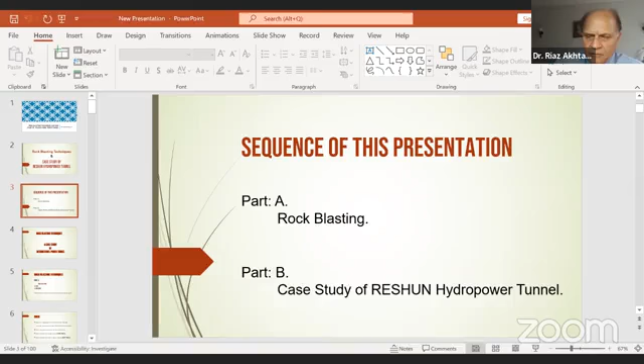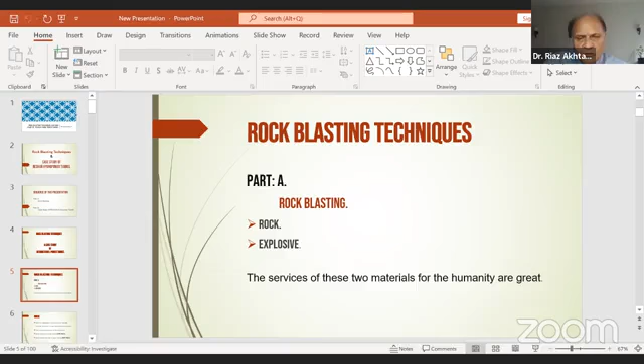Rock blasting techniques. In rock blasting, two materials are involved: one is rock, and second is explosive. The services of these two materials for humanity are great, and they have provided solutions for so many engineering problems.

Rock is an aggregate of minerals, which are naturally occurring substances having a fixed chemical composition. Thus, minerals control much of the rock behavior. The quality of rock depends upon the mineral that the rock contains. Sometimes minerals are strong, then the rock is hard rock. If the minerals are weak and soft, then the rock is soft rock. This is a very generalized classification of rock; I'm not going into a detailed geological classification.

What is the difference between rock and rock mass? Rock means continuous, homogeneous, isotropic, intact rock containing no significant fracture. Whereas rock mass is rock with joints, fractures, faults, and all geological discontinuities in the rock matrix. That is rock mass.

Actually, in tunneling and in engineering, we are dealing with the rock mass, not the rock. So I just clarify this terminology of rock and rock mass. What is rock and what is rock mass? What does it mean when we are calling it rock mass? That is the rock mass — the rock with all faults, joints, fractures, cracks — that we are dealing with.

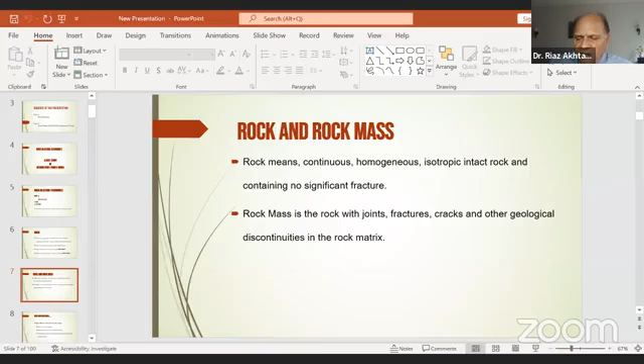Types of rocks are formed by three main origins. Again, it's the simplest classification and division of rock. Simplified, three main origins are there: igneous rock from magma, lava, volcanoes; sedimentary rock from sediments, lithification with time; and metamorphic rock through metamorphism due to high pressure and temperature.

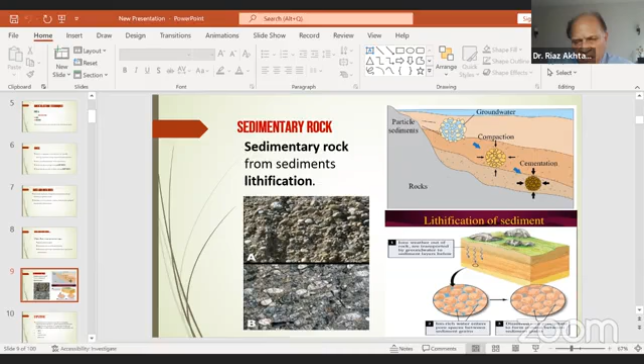Sedimentary rock forms from sediments through lithification. With time, the water in the substance in the rock material reacts with the ions of the rock, and then solidified, well-cemented rock particles, sediments appear. 75% of the surface of the earth is this sedimentary rock, whereas in the crust sedimentary rock is only about 5%. I'm explaining this because the case study of the tunnel which we are going to discuss today was 75% of this material — a well-cemented conglomerate was there for the blasting purposes. So I'm explaining it a bit in detail, that sedimentary rock.

Now we come to define the explosive. An explosive is a reactive substance that contains a great amount of potential energy that can produce an explosion if released suddenly, usually accompanied by production of light, heat, sound, and pressure.

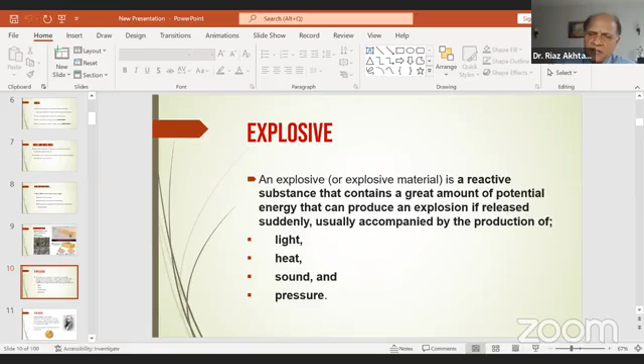When this explosive reacts, these are the parameters we are observing.

While talking about explosives, no one can ignore that great man, Alfred Nobel, Swedish chemist, engineer, inventor, businessman, philanthropist. He invented the first generation dynamite in 1867. He is also known as the benefactor of the Nobel Prize, which is the highest prize in the world, I think, so far.

In Pakistan, the main manufacturers of explosives are Biafo and Nobel. Biafo in Hattar is manufacturing super blaster and breaker. Their product is a bit inferior compared to Nobel.

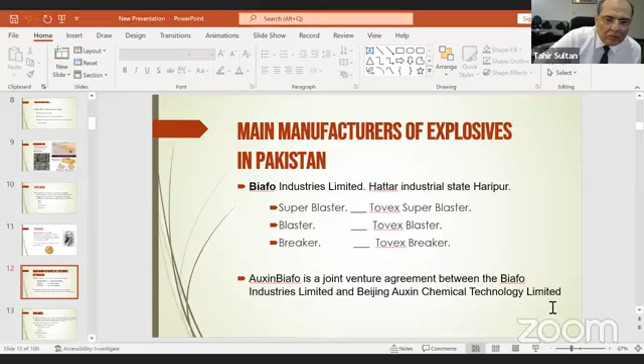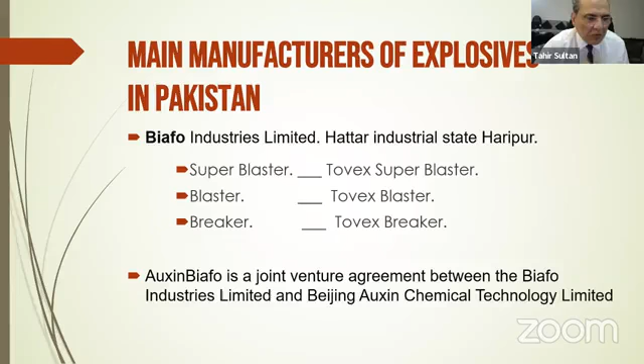The famous Nobel is a joint venture with Sweden, Japan, and many other countries. They are producing quality explosives, quality dynamite there. Now they also have a joint venture with Saudi Arabia and other countries.

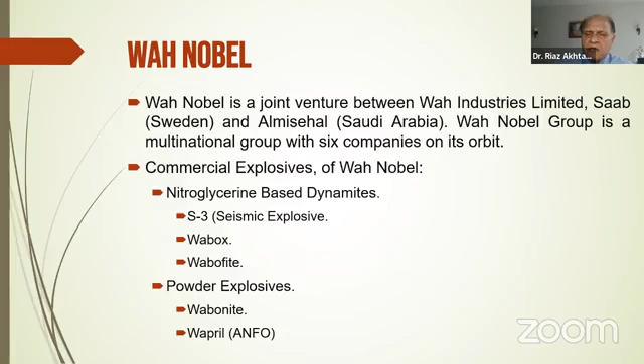Commercial explosives of Nobel include nitroglycerin-based dynamites, S3 seismic explosive, and Wabox. Wabox is an excellent product of Nobel. Then there's Wabofite, and the powder explosives Wabonite and ANFO, which is ammonium nitrate with fuel oil.

Then emulsion explosives: seismic emulite E3, emulite 150, and emulite 100, permissible Emulite. These are the emulsion explosives.

To detonate these explosives, there are accessories, detonators. Detonator number 8 plain, that is a trade name, and electric delay detonator number 8 also. Different delays are there - 25 milli detonator, then half-second detonator. This is the delay time. 25 milli means it is 1/40th of a second, the time delay.

There is Leher, also a trade name of the detonator - seismic detonators, millisecond MS, and half-second electric detonators. Blasting cord, Wabocord is there, safety fuse is there.

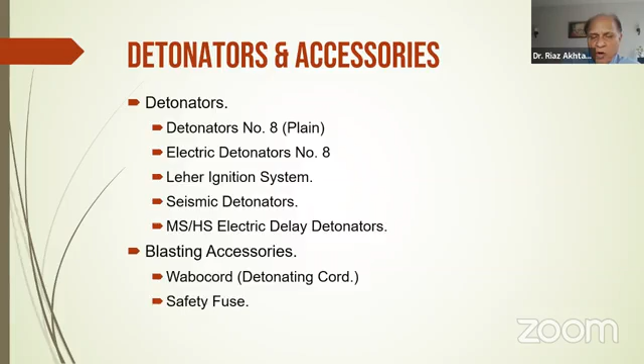Then the Wabox, brief introduction - a nitroglycerin-based dynamite. This is an excellent product of Nobel giving excellent results of advance in charging. It is very good in handling, and the safety record is beautiful, no risk is there. It's a beautiful product, the Wabox.

It is a state-of-the-art type of product, widely used in explosives, in tunneling, and in all other activities of excavation on surface or underground. This product is excellent, and mostly engineers are using this Wabox.

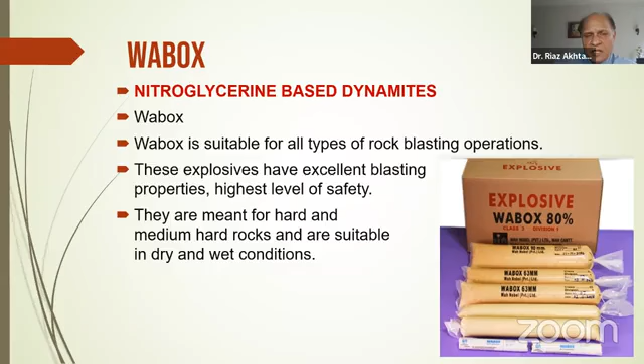Then there is seismic explosive S3, mostly used for exploration in the oil industry. They are using it - good for water resistance, extremely high hydrostatic pressure bearing, capable of withstanding that. So it is being used for oil exploration. This is a good product for that field.

Wabofite is a bit inferior nitroglycerin-based dynamite compared to Wabox, and a bit cheaper also. The combination of these two explosives, Wabox and Wabofite, is good to get optimum advance in excavation, in tunneling. This product is also very good in combination to achieve some economy in blasting.

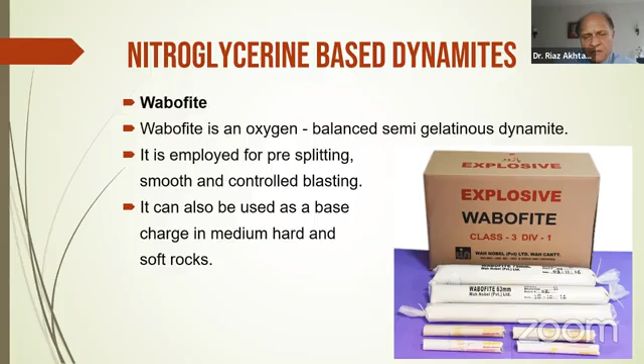It's good for soft rock, but the combination of Wabox and Wabofite can give good results even in the case of hard rock.

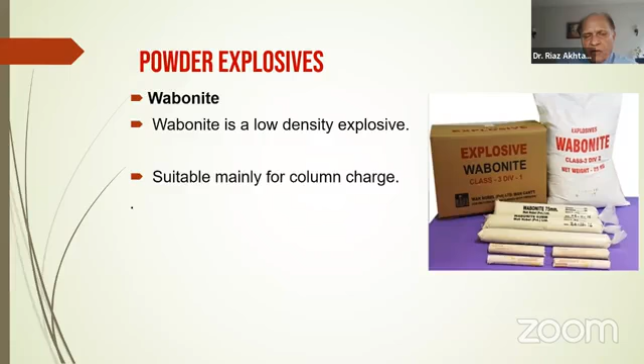Wabonite is a low density powder explosive, suitable mainly for column charges. Sometimes we charge the column, and as primer we use dynamite - Wabox we use as primer dynamite - and then with the combination of Wabonite and Wabofite, we get the economy there.

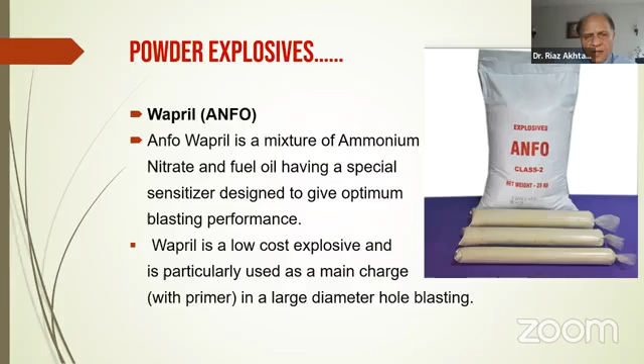Then there is ANFO again, for large explosions and for large diameter drilling holes. For dry conditions, we use ANFO for excavation of the surface, preferably surface blasting, benching. We are using this ANFO.

Seismic emulite, seismic emulsion explosive E3, meets the highest standard of safety. E3 has excellent storage properties, especially to bear temperature and humidity. It is good for high temperature and humid places.

Emulite 150, again a trade name, trade nomenclature of the explosive, can be used as bottom charge for any kind of blasting, especially for deep underwater blasting. We use these emulsion explosives there. These are also emulsion explosives of different trade nomenclature, having different properties.

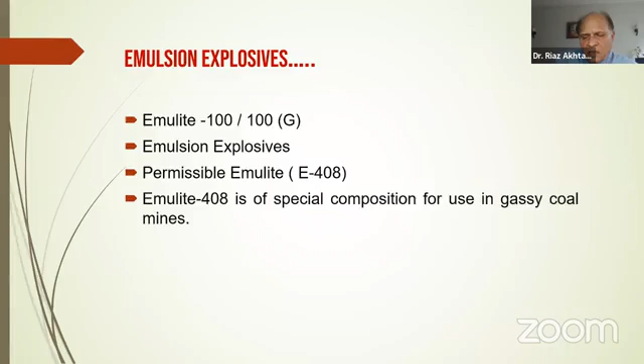For specific jobs, we are using emulsion explosives. Then there are detonators to detonate the explosive. These are the accessories of Wah Nobel.

Plain detonator - this is a non-electric delay detonator. When there is an open excavation, that's a bench excavation, so we are using this.

At that time, we are not needing any delay blasting there. In case of bench blasting or surface blasting, we are always having two faces free there, so the rock can move easily.

But in case of underground blasting, or tunneling, we are having only one face for moving - space is there only at one face. But sometimes in bench blasting, we might be having three faces even, if it is corner blasting there, so we encounter three faces open.

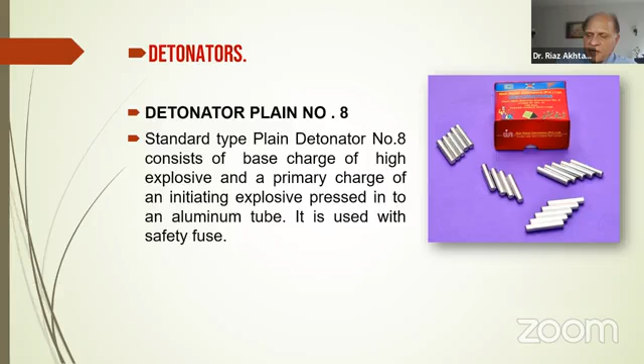And that is very easy. With a minimum use of the dynamite, we can get a maximum production there.

Then there are electric detonators. These detonators are required for blasting purposes, especially for tunnel or generally underground blasting. We are requiring the delay to blast the different drill holes.

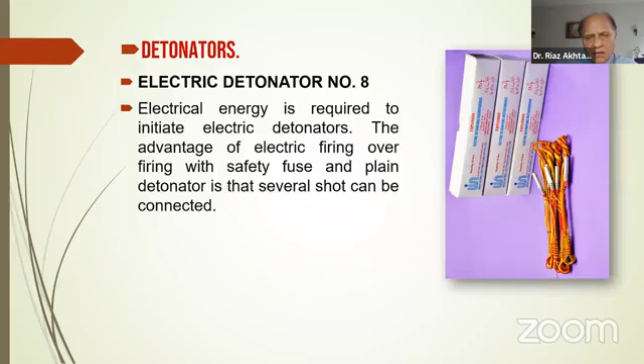These are again detonators. Leher is again a commercial nomenclature of detonation. This is initiated by shock wave, not electric detonation - Leher is acting as a non-electrical detonator, acting with shock waves.

Advantage is no stray current is passing anywhere in case of Leher - no side initiation, no noise problem, simple and rational connections, no limits on the size of the blast round. You can blast as many drill holes as you like.

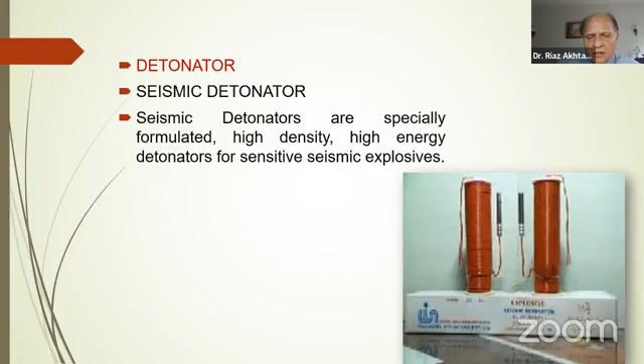Excellent detonator. Seismic detonators used for the exploration of the oil field, creating a sensitive seismic explosive to detonate. These two are very important detonators.

Millisecond, half-second electric delay detonators - we select these. Millisecond means it is 1,000th part of the second.

And we used 25 milliseconds in our Reshun tunnel. That meant 1/40th part of the second.

Millisecond and half-second electric delay detonators are meant to effect delayed blasting action in multi-row bench blasting and tunneling, giving better fragmentation of the rock. As desired, we can have required fragmentation and size of the excavated rock there, just by changing the timing and the quantity of the dynamite.

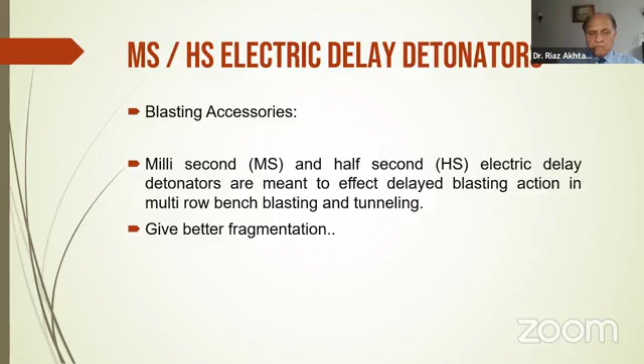Then there is Weber cord, detonating cord, that is waterproof with PVC and having a coating of powder explosive there. We are using that also.

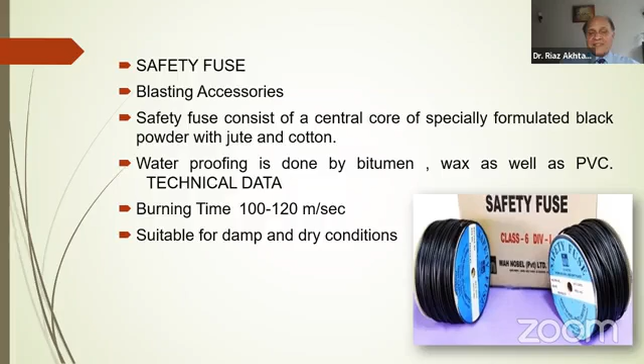And this is the famous black safety fuse. As we have observed in the movies, they are blasting with this - a cord is burning there and reaching the dynamite, and then there is a blast. That is the famous cord we are using there.

Rock drilling system. Mechanical operation can be performed basically in two ways, by percussive and rotary action. Though two actions are there for drilling purposes, we are using only these two, and sometimes it is a combination of both, rotary and percussive motion of the drill machine.

That is then called the hybrid method, rotary-percussive method, which is a combination of these two mechanical actions for rock drilling.

Techniques of controlled blasting means to mitigate adverse impact of blasting in open pits, quarries and tunnels, underground metal mines, and construction working. The purpose of the technique is to do the blasting in a way that minimum disturbance should be there.

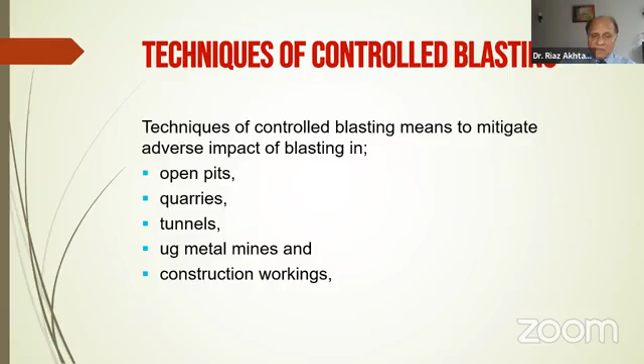Disturbance of the inhabitants, disturbance of the other locality there, structures there, and disturbance of the mother rock even - we are requiring not to damage the mother rock. So that is a technique to control the blasting, to mitigate all these problems.

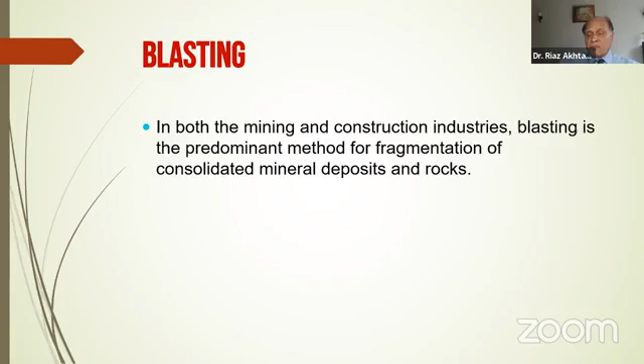In both the mining and construction industries, blasting is the predominant method for fragmentation of consolidated mineral deposits and rocks. This is the method for getting the fragmentation of the rock or minerals.

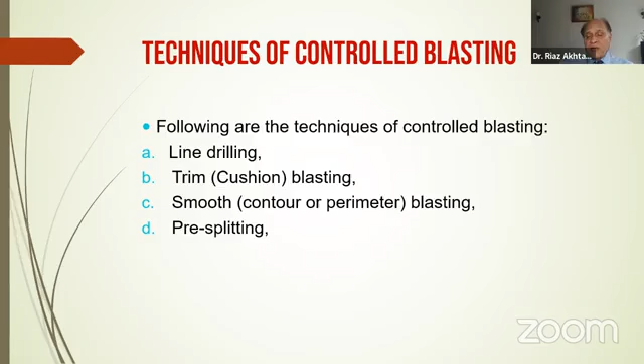To control all these impacts of blasting, the following are the techniques of controlled blasting: line drilling is one method; trimming or cushion blasting is a second method; and then smooth contour or perimeter blasting, and pre-splitting. These are the blasting techniques we adopt to mitigate all those problems.

This system, line drilling. What is line drilling? The system involves a single row of closely spaced, uncharged holes along the neat excavation line. We drill a line of drill holes without charging them, just providing a sliding surface, a breaking surface to save the mother rock behind that line. We don't want to disturb the mother rock, so we drill holes in a line to split that portion of rock mass which we are going to blast and fragmentate.

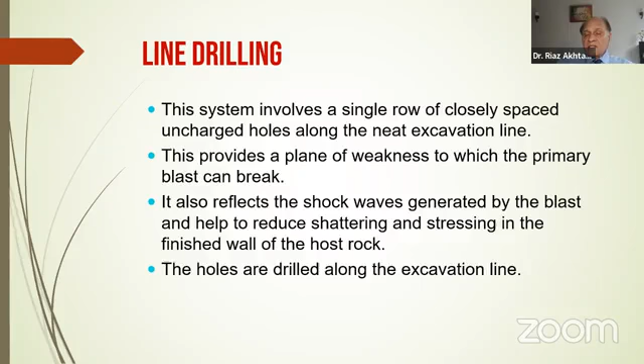We provide a line there. This provides a plane of weakness to which the blast can break. It also reflects the shock wave generated by the blast and helps reduce shattering and stressing in the finished wall of the host rock. The holes are drilled along the excavation line. This is one method.

Now the pros and cons of line drilling. This technique gives maximum protection to preserve the rock's original strength. The disadvantage is that a high quantity of drilling is required, and drilling is an expensive activity. So that is the disadvantage, but we get a very smooth surface by adopting this technique after the blast.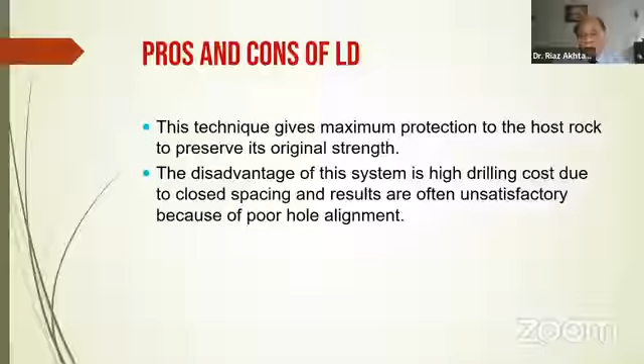Trim blasting, like line drilling, trim or cushion blasting involves a row of holes along the specified final excavation line. These holes we are going to charge, whereas in line drilling we were not charging those holes. Here we use explosive to get the same result.

As compared to the line drilling technique, trim cushion blasting is simpler and economical due to increased spacing. In line drilling the spacing of the drills is very close, but in trim and cushion blasting the space between two drill holes is considerably wider.

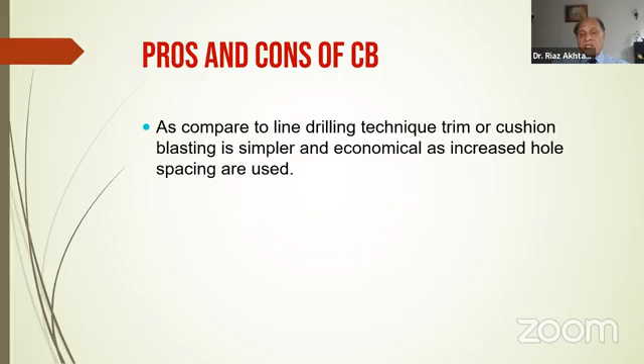Again, pros and cons: as compared to line drilling technique, trim or cushion blasting is simpler and economical as increased hole spacing is used.

Smooth contour blasting. That is the technique where before doing anything, you drill the contour end line of your face. For example, if you are going to excavate a tunnel, the outer contour needs some cracking, and you do this contour blasting at the periphery of the tunnel.

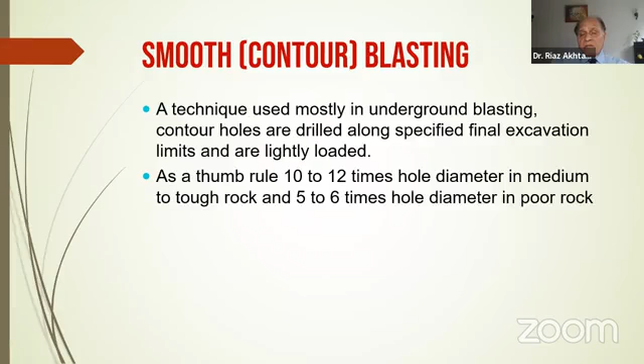Different thickness of the hole and spacing is mentioned here. For promoting safety and economy in underground excavation, working performance of the blast heading is a very important factor. An ideal blast results in minimum damage to rock with minimum overbreak. Using this contour blasting technique, we achieve minimum overbreak because we give the initial crack already to the face. Smooth wall, minimum fracture, minimum overbreak, less support required, better economy and safety are achieved with this technique.

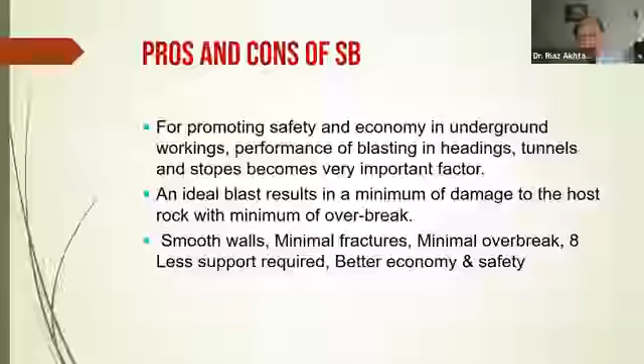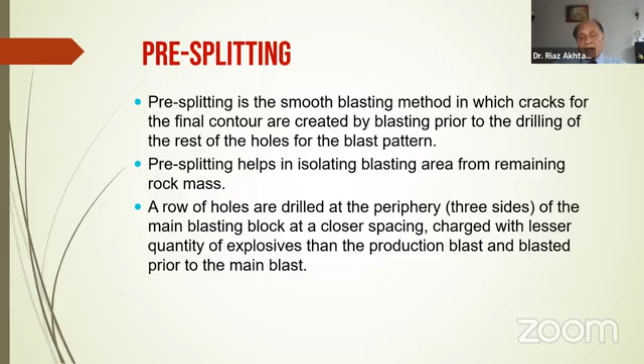Same procedure again: we provide holes along the mother rock, along the contour line, along the area we require to blast, and we split the blasted rock mass from the parent rock using explosives. Prior to the main production blast, we also have a pre-blasting of this pre-split line before the main blast. So we provide a pre-splitting crack along the extreme line of our face.

This is an effective way of restricting back-break and ground vibration, and we can avoid excessive ground vibration by adopting this technique.

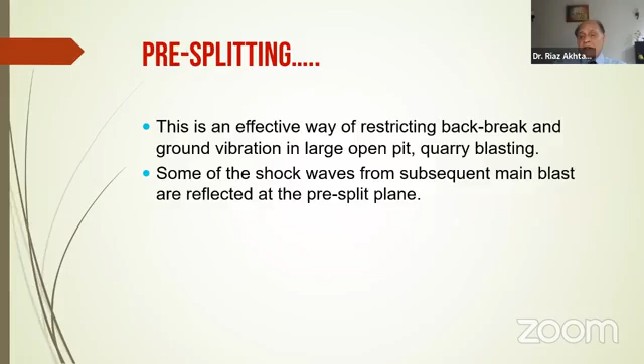In large open pit quarry blasting, some of the shock waves from the subsequent main blast are reflected at the pre-split plane. This is pre-splitting of the rock. Pre-splitting holes are lightly charged, and we have a blast before the main excavation exercise. We conduct a preliminary blast in these pre-splitting holes to create a fracture plane and save the mother rock.

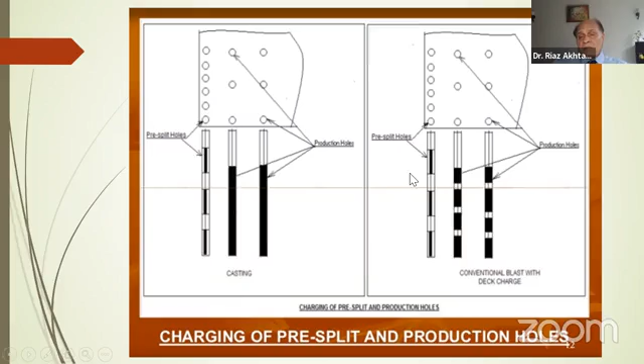Muffle blasting: while we are blasting there is a fear of flying rocks, especially if we are working in a congested area. This is a big problem to be checked there.

When conducting blasting in dense human habitation or congestion areas, muffle blasting is a technique to avoid fly rocks. We cover the whole face with some mat, sandbags, or anything like old tires. Muffle blasting is required in built-up areas where there is a fear that fly rocks will damage the neighborhood.

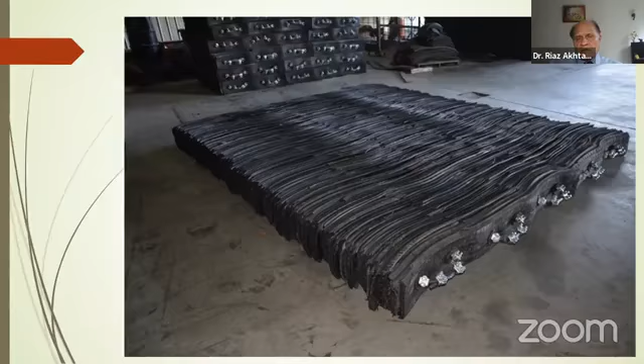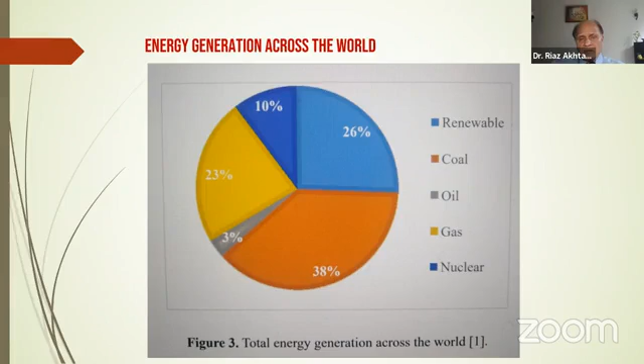A number of projects are under construction in the northern area and other parts of the country, and hopefully in the next decade we will have a considerable contribution of hydropower in our system. This is the reason tunneling construction is going to be important for hydropower, as well as for transportation and other utility services.

Now the trend is to go for tunneling, and the results are excellent. The national highway has 25 kilometers of tunneling in our country - beautiful tunnels they have constructed. The trend has changed now: instead of disturbing the toe of mountains and the environment adversely, they are going for tunneling without disturbing the toe of the mountains.

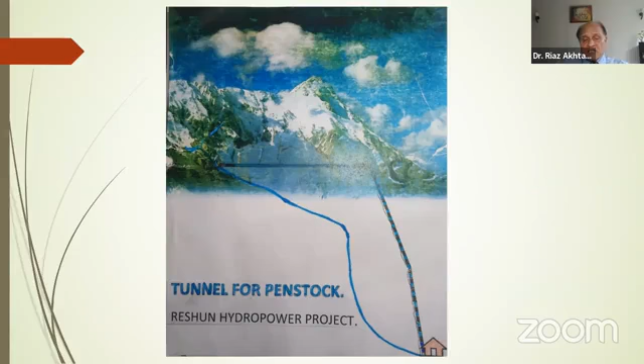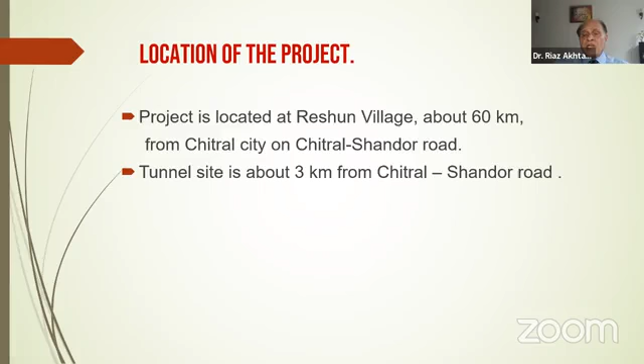This is the title of the next portion of the presentation: Tunnel for Penstock. Location of the project: the project is located at Reshun village, about 60 kilometers from Chitral city on the Chitral-Shandor road. The tunnel site is about 3 kilometers from the Chitral-Shandur road. This Chitral-Shandur road is N45, our national road network. From that road, the Reshun tunnel site is 3 kilometers away.

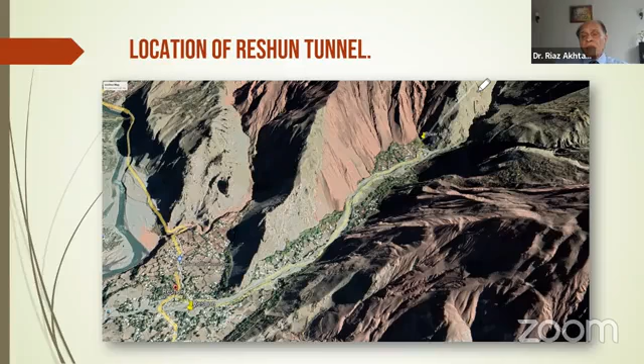The Reshun hydropower project hierarchy: the client department was SHYDO, then it changed to PEDO, and now it is PEDO, the KPK energy development organization. At that time, when we were excavating the tunnel, the MD was Engineer Amir Zaman, Engineer Muhammad Bashir was the PD, and the RE was Nurul Bashir. The consultant and donor was GTZ, a German organization, an NGO. The work of GTZ is remarkable. They provided the potential of hydropower data in all the northern areas, compiling beautiful data about hydropower potential there. Very hardworking people, I worked with them for 3-4 years. Excellent people, they tried to help out all the people there.

Michael Richel was the team leader. Dr. Kunert was the geologist, and all his investigation and geological report was about the Reshun tunnel. Mr. Paschke and Grossman were the two engineers. I worked from Techno Engineering, and I was in charge of that project at that time.

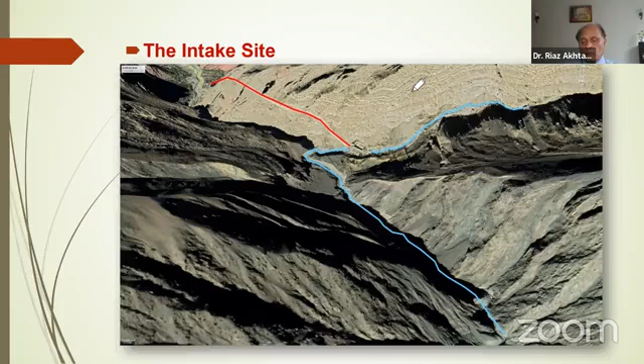Again, this is RESHUN Gol and the penstock. The reservoir is there, and the outlet, this is the penstock going into the tunnel. The excess water of the spillway, the excess water of the reservoir, flows into the RESHUN Gol, and ultimately into the Chitral River.

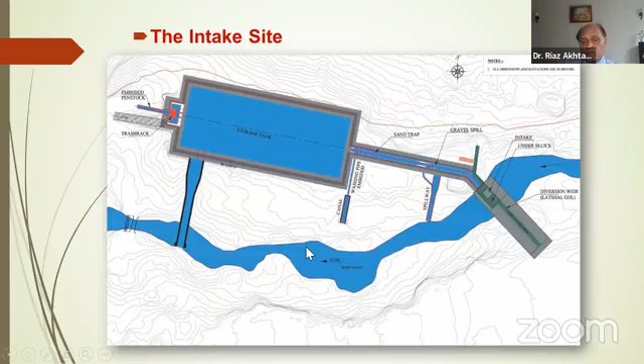This is again one picture of the reservoir, and this is also the reservoir.

According to the preliminary seismotectonic map they consulted, the project area is one of the major earthquake zones of Pakistan, based on 1975 data. As per the preliminary report of climatology and hydrology, the mean annual regional precipitation is about 1000 mm. The general geology of the area shows a sequence of metamorphic rocks consisting of shale, slates, greenstone, marble, sandstone, and also intrusion of Tirich Mir granite.

Investigation shows the tunnel area consists of hard, massive, calcareous conglomerate, well-cemented, self-retaining. We were lucky that about 75% of the tunnel was sustainable, well-cemented conglomerate with a good look inside. Only a small length had sandstone, where we provided a concrete safety system. Otherwise, only shotcrete or rock bolts were enough for the safety of the tunnel.

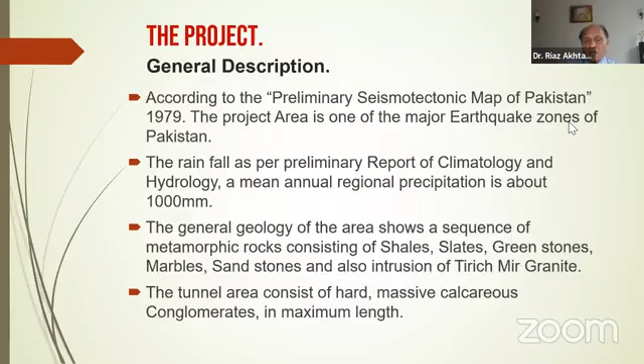This is a salient feature. The RESHUN Chitral location has a total capacity of 4.2 megawatts, with 3 Pelton wheel turbines, each with a capacity of 1.4 megawatt, combining for 4.2 megawatt production. The design discharge is 1.62 cubic meter per second, net head is 320 meters, and the length of the power tunnel is 1.75 kilometers, with 3 Pelton turbines each of 1.4 megawatt.

The transmission line type is a 33 kV transmission line, with a length of 240 kilometers, and a distribution line of 400 kilometers, serving a total of 17,000 consumers.

One thing to note is that this electricity is not coupled with the national grid. It is distributed through local arrangement, since people didn't want to give it to the national grid because they had been fighting for decades for this powerhouse. So it is distributed locally, not to the national grid, with about 17,000 consumers and houses having electricity from this powerhouse.

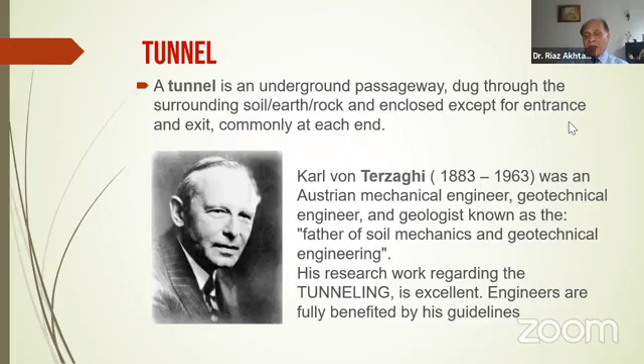When we talk about the tunnel, we cannot go without mentioning the great man Terzaghi. His research and findings are still helping tunnel engineers. His guidelines are excellent, he founded beautiful, innovative research, mentioning each and every stress induced in the tunnel. He's known as the father of soil mechanics and geotechnical engineering.

There are many methods for tunnel excavation, but in our case we went for the conventional method of tunneling. There are tunnel boring machines and jumbo drill machines, for mechanized excavation of tunnels. Only in some projects they used tunnel boring machines, and jumbo drills are used for tunnels with a good surface area and heavy face. But for a small face, a small area, we used this conventional method for tunneling.

There is a cyclic execution of the process, repeated steps of excavation for the relevant primary support. There are 4 or 5 repeated steps for the excavation of tunneling: drilling, charging, blasting, ventilation, mucking and hauling of the excavated material, and setting out for the new blast. After doing the first 5 steps, we again set up for the new blast.

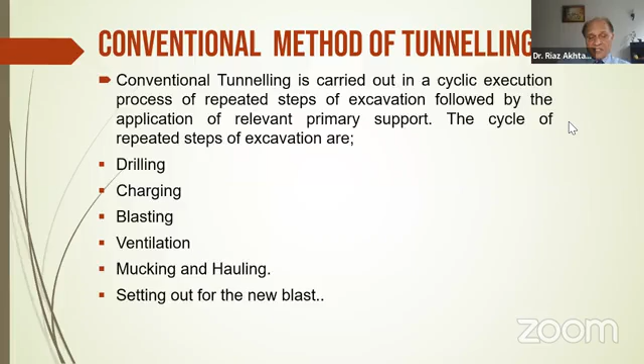Drilling pattern, there are many drilling patterns: wedge cut, burn cut, pyramid cut, and fan cut.

Ladies and gentlemen, this is a wedge cut. I just want to explain the wedge cut. These are the inclined holes. This hole is going like that, and the other hole is like that. These 3 holes at some angle are forming a wedge in the middle of the face of the tunnel.

When these holes are horizontal, this is a horizontal wedge. When these holes are drilled in a vertical direction with some angle, then it is a vertical wedge. There is also a combination of vertical and horizontal, one horizontal and one vertical. Then this cut is called pyramid cut, forming a pyramid shape when the wedge is on two sides, vertical and horizontal.

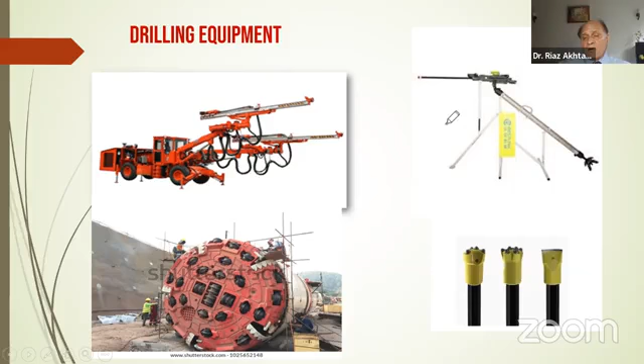But that is the simplest jackhammer, pneumatic or fuel jackhammer. This is a supporting leg, and the person can easily hold that. We adopted this technique, using this machine for the drilling of our tunnel face. These are the rods and the bits. Bits are removable and can be refixed, getting new bits there. This mechanism was adopted for small face tunnels.

Well gentlemen, just one example, a very interesting experience we had during the excavation of this tunnel. Very interesting, and it is an experience to be shared with young engineers, to be transferred to the blasters, a valuable and good experience.

We are having this face after drilling. Periphery holes are there, and then the empty hole is here. This is a clear burn cut situation, this pattern of drilling. The blaster charged it, he inserted the cartridge of dynamite in each hole, the designed dynamite.

With experience, we were having the set design of blast there. We see the rock, what type of rock is there, and with experience, having maximum efficiency, we got the design there. So that face was charged.

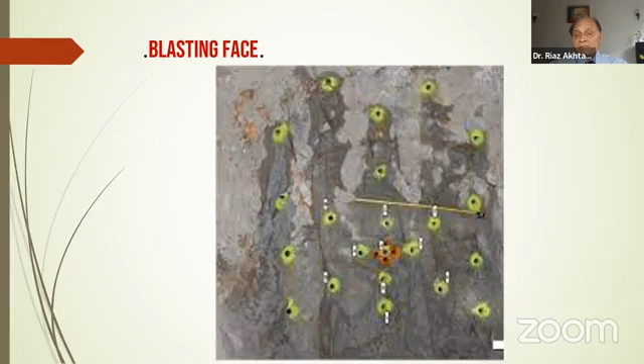Yes, these cords are there, 25 milli detonators were there. First of all, this was designed to blast this burn cut first, then this layer, then this layer, then this layer, simultaneously with some delay time.

We tried to pull back the cartridge of the dynamite. We inserted steel rods there and pulled it back, but only partial dynamite came out, not fully. It is not advisable to re-drill on a charged face, some accident can happen there. So no one was prepared to drill on this face again. They asked us to remove the dynamite from the face first.

Well gentlemen, then our blaster gave a good idea. He electrically changed the connection of all these holes, changed the connections, the circuit, and changed the delay time. He changed these cords, connected this to this, and the idea was to blast these holes first.

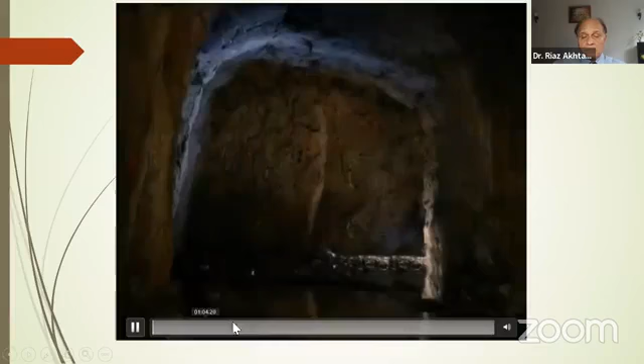This is drilling being done. Look, this is a technique using a delayed detonator.

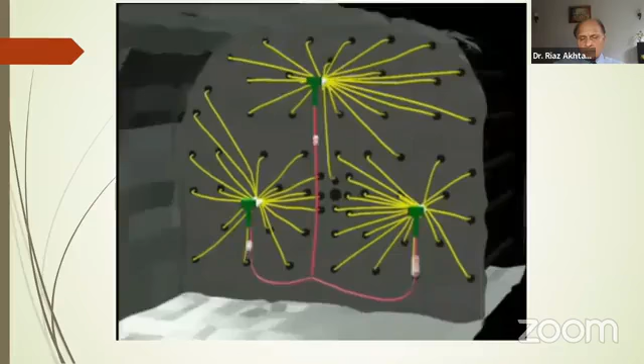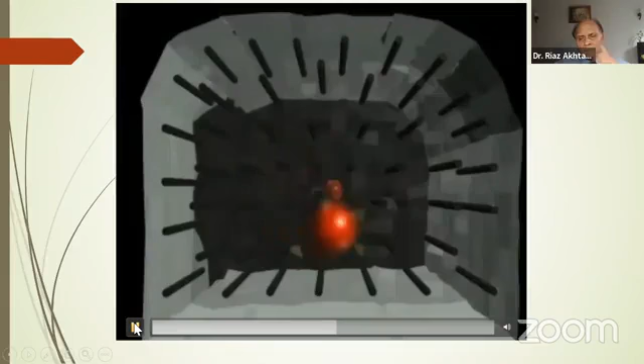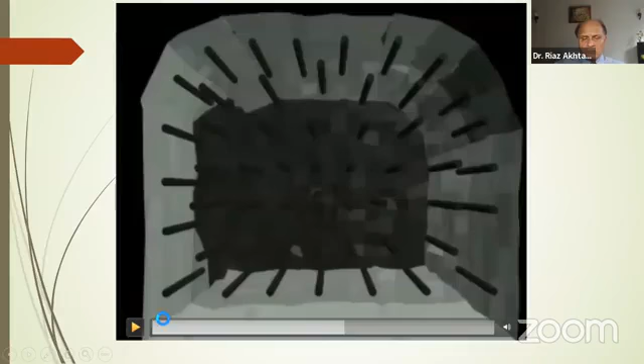He's showing it from the back side. You know how this delayed detonator first gives the movement of the inner core, that is, yes.

Then there is a support system, three main types of primary support. There are primary and secondary support systems. Mostly we require the primary support. Secondary support is lining of the tunnel, steel lining, concrete lining. Seldom do we require the secondary support, but the primary support system is frequently, mostly required there. Three main types of primary support systems are presently used in rock tunnels.

They are rock bolting, steel sets, and shotcrete. These are the famous techniques to support the rock system there. Rock bolting is very important. Just after the blast, we examine the face of the tunnel and the sides of the tunnel. If there is some fear that some rocks are going to be dislodged, in conglomerate it is well cemented, but there are faults, there are fracture lines there.

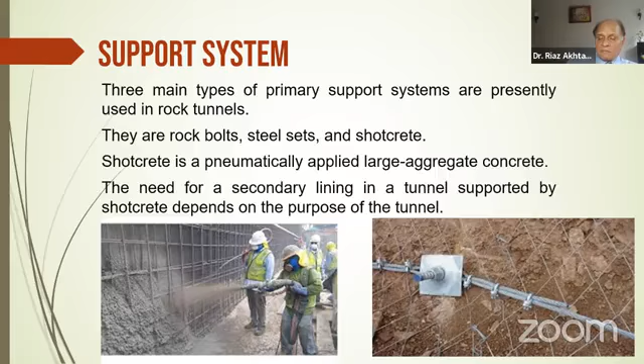Then ventilation is very important. The main objective of providing a ventilation system in tunnels is to address the problems we are facing in tunnel work.

These are the stuff. I couldn't get the picture of that ventilation system, but let me share one experience with you, young engineers. We installed an exhaust fan there. Then our foreman put a pipe, about 0.75 to 1 feet diameter, 5 feet long, with that fan, and closed the fan with a sheet right at the mouth of the fan. Then he came to me and said, sir, there is no airflow in the pipe.

Hydraulics or fluid mechanics engineers know that when there is a sudden contraction, it disturbs the boundaries of the air flow and negative pressure is created there. That was the phenomena working there, and there was no forward flow in the pipe. There was negative pressure and the air was stagnant.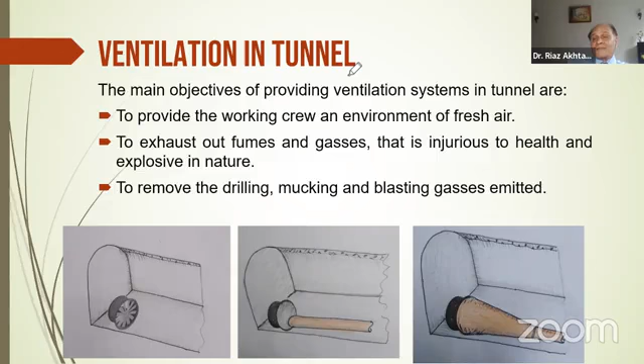Then mucking and hauling is a big problem. Drilling is a time-consuming and cost-consuming problem as a drilling activity. But the most cost-consuming and time-consuming problem is mucking of the excavated material and hauling it out. If you clear the tunnel face, then you can start other activities, so it's a very critical activity we have to tackle.

Initially, when we started the tunnel, we deployed a tractor trolley for mucking and hauling of the excavated material. But after some time, even after 100 meters, the tractor and trolley started creating suffocation there. Diesel fumes were present and the drillers were not feeling well, so on an emergency basis we had to leave this arrangement of tractor trolley.

We were not planning to stop the work, so we hired donkey labor for this purpose. That labor was environmentally okay, but they were slow, taking too much time to clear the tunnel face.

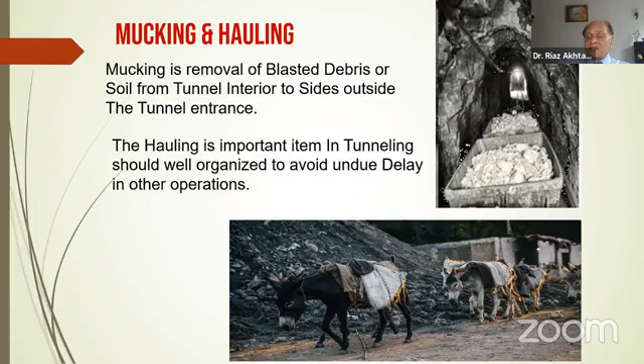Then we designed a track and trolley system there, and that was the ideal, ultimate solution for mucking and hauling. We tried the trolley ourselves and installed the track using inverted T-iron, two T-irons, as the track inside the tunnel. There was a rope, and a pneumatic winch was used just to pull the empty trolleys to the face. Otherwise, filled trolleys were moving with gravity force, no energy needed to be provided to the filled trolleys.

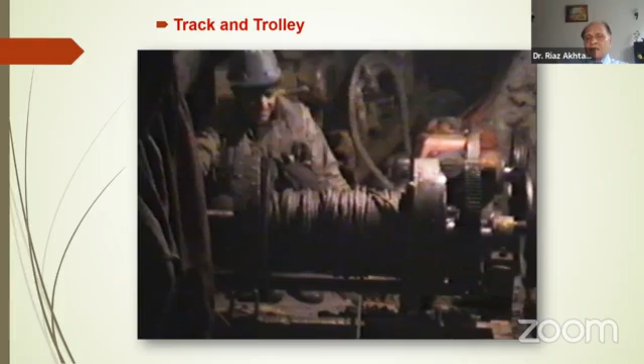This pneumatic winch was used to pull the trolleys. Trolleys were designed in such a way that while traveling on the track, they had an angle such that they traveled in a horizontal direction, horizontal level. We designed the body of the trolley such that the 12% slope of the tunnel was not affecting the trolleys.

The typical cross section: the penstock was designed to be supported on reinforced concrete piers. This was the original design, that the penstock would come into the tunnel and rest on the pedestal, a concrete pedestal, or alternatively be hung from the roof of the tunnel. One design had it on concrete pedestals, RCC pedestals, spaced 3 meters apart center to center. The other design was just to hang the penstock from the roof.

There were about 50 million rupees allocated for the road from Reshun village to the reservoir.

This idea was floated to GTZ and the other client: have the penstock buried in the floor of the tunnel after excavating a trench. Once the tunnel was completed, excavating the trench was easy, just open blasting, and within months they could excavate this trench for the penstock. All three stakeholders agreed with this idea, to have the penstock buried in the tunnel floor, and then use the tunnel as an access road to the reservoir. Nowadays this tunnel is being used as the access road because the penstock is buried in the floor.

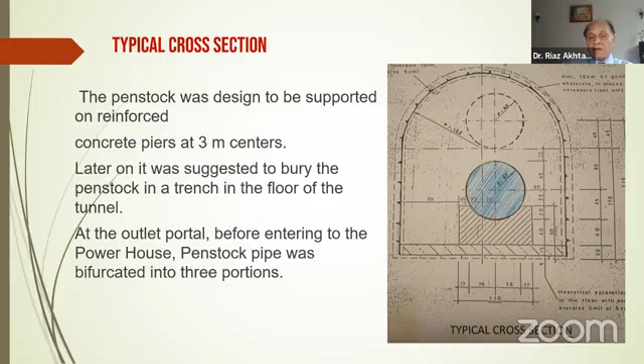Our interest was that people would come and see our work. If the penstock was just hanging or standing there with no accessible jeep road, no one would come, and no one could judge the work done there. Now this arrangement exists, with the tunnel being used as an all-weather road to the reservoir.

This is the inlet portal of the tunnel. I'm just showing how the tunnel is being used as an access road. Here a four-wheel pickup is going inside the tunnel, and this is another view of the tunnel being used as an access road.

There were three lateral tunnels for ventilation and for mucking and removing excavated material. In the design, there were three adits, and at those points it is very comfortable and pleasant, with an air breeze near the adits.

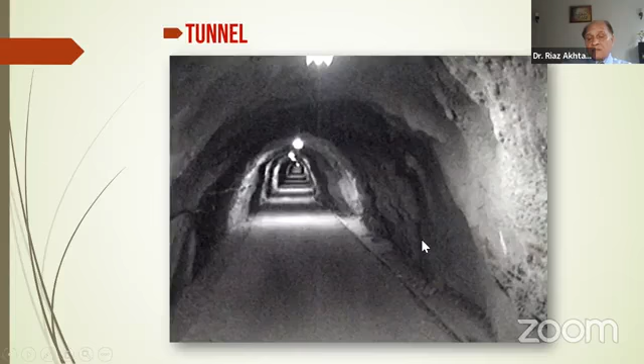That is the tunnel alignment from the reservoir. This is the reservoir, and the tunnel goes to the powerhouse. Near the powerhouse, the single penstock buried in the tunnel floor bifurcates into three penstocks of 0.6 meter diameter, providing hydropower to three Pelton turbines.

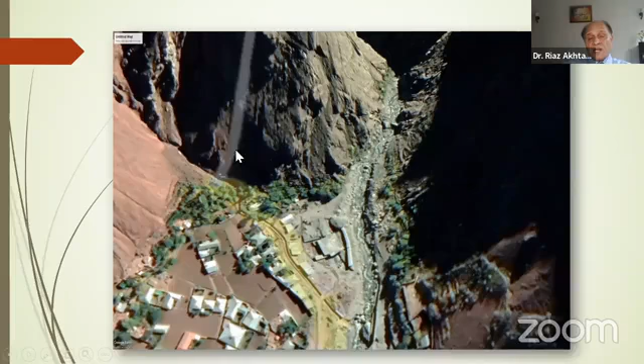This is the portal, and this is the powerhouse inside. This is the powerhouse building, and this is the tunnel portal. This is a view of the powerhouse, with three Pelton wheel turbines giving 1.4 megawatts each. One is this, another is this, and the third is this, giving excellent performance and good production of electricity to the locals.

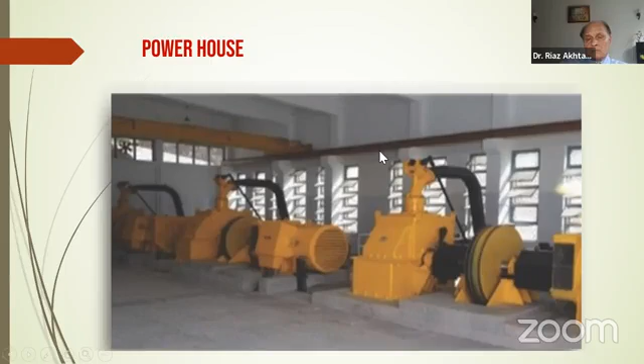Gentlemen, the surveyor told us the outlet portal would come here. But unfortunately, we encountered a gorge just before this outlet portal, about 300 meters downward. Suddenly we encountered a gorge, and Terzaghi warned about such gorges in tunnels many times. Many tunnels face this problem, and sometimes they get choked, creating great difficulty to clear. It even took 2 years to clear gorge debris from a tunnel in Lebanon and other countries.

We also encountered a small gorge with sand flood, debris, and stones. The tunnel was filled with that, and we tried to remove the debris, but it was time-consuming and more debris kept coming. We were not successful in getting it removed.

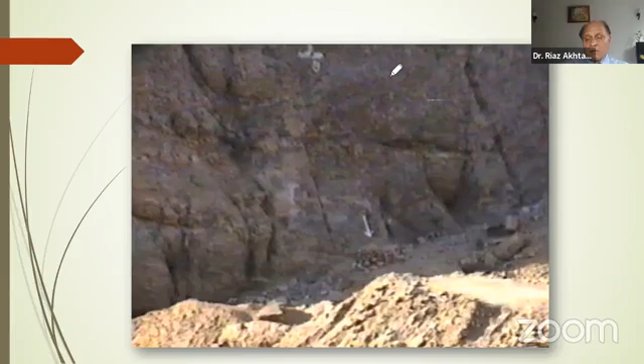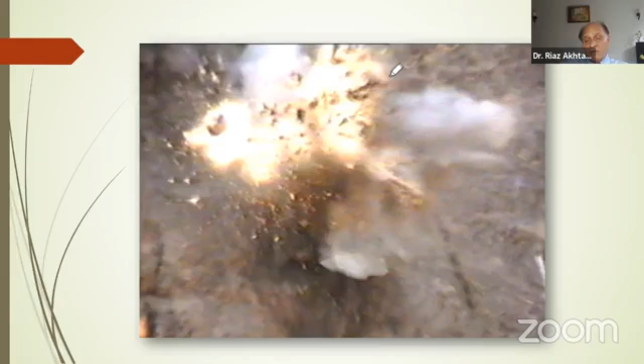Gentlemen, this is the initial blast. When we captured the first instant, the last blast of the tunnel, and this is again the last blast. Yes, this is fully blasted, the last hole was there, and the tunnel was completed. Excavation was completed successfully, and the people were celebrating the opening of the tunnel.

This was the outer portal, and here I am sitting, if you recognize me. At that time I was quite young. And here is the outer portal.

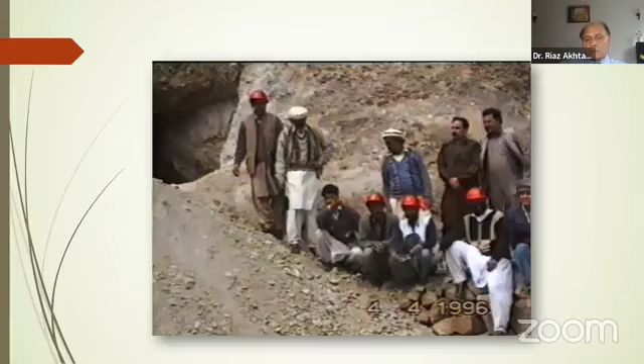Now, a few recommendations. This is the end of my lecture. A few recommendations, gentlemen.

Those tunnels are water tunnels. There are still tunnels under construction. A few hydropower projects are under construction in the vicinity of Chitral. There is the Golen Gol project, having an 8 kilometer tunnel, a water tunnel with gravity flow.

Then there is the Drosh powerhouse, also having a 5 kilometer tunnel, U-shaped, an inverted U. That is also a water tunnel with water flowing by gravity. The Reshun tunnel was only a penstock tunnel, not designed to have water inflow inside the tunnel.

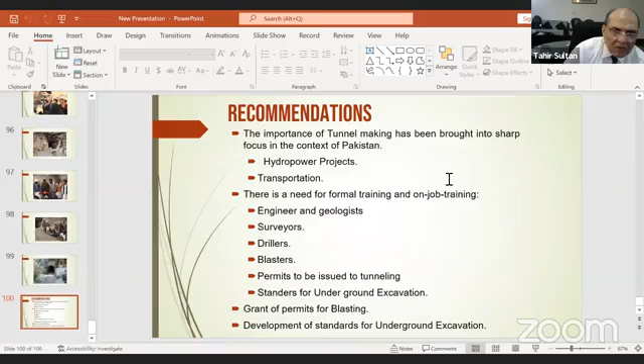Please go ahead. I don't really know what type of rock they had, and I'm not an expert in geology. But since Dr. Riaz has worked there, I'm assuming it must be good rock and not profusely fractured. That's why their bolting worked. Is that a correct understanding, Dr. Riaz? Yes sir, you are very right.

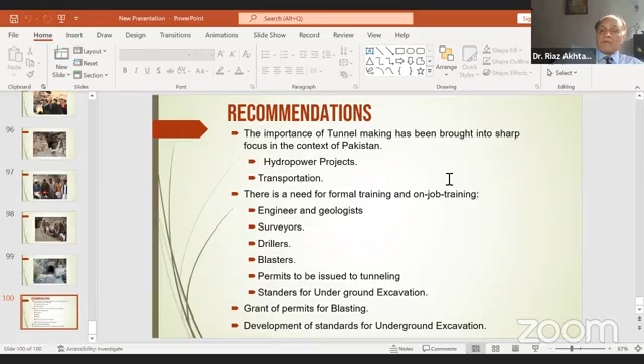Before the presentation I told that more than 75% was well-cemented conglomerate. But wherever some sandstone or metamorphic rocks are there, some cracks or fracture was observed, and that portion was well rock bolted. Those hanging portions, when we observed some horizontal crack there, and a crack behind that rock mass, we drilled through those two cracks to fasten it to the mother rock behind it.

There were cracks there, observing that. Mostly the tunnel geology was well cemented conglomerate. It was not showing any crack and was self-sustaining the shape of the tunnel. Thanks, this answers my question. Thank you, sir.